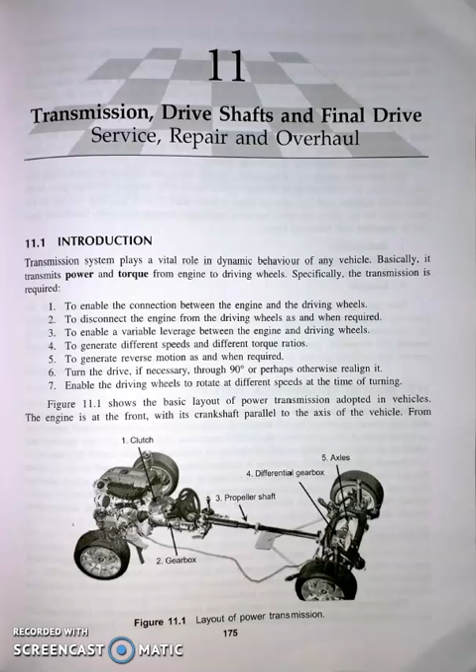The figure shows the basic layout of power transmission adopted in a vehicle. The engine is at the front with its crankshaft parallel to the axis of the vehicle. From the engine, the drive is transmitted through a clutch and a short shaft to the gearbox. In cars, this short shaft is almost invariably integral with the primary gear in the gearbox, but in some commercial vehicles it is a separate component, generally with flexible or universal joints at each end and in some instances with a sliding joint at one end.

From the gearbox, a propeller shaft with a sliding joint at one end and a universal joint at both ends takes the drive to the live back axle. A live back axle is one through which the drive is transmitted, while a dead axle is one that does not transmit the drive. Bevel or worm gearing within the axle turn the drive through 90 degrees, and the differential gearbox divides it equally between the two drive shafts or half shafts which take it out to the wheels.

The gearboxes which are or have been used in motor vehicles may be divided into two parts. Number one, those in which the drive in every ratio is transmitted indirectly through gear teeth which mesh together. Number two, those in which direct shaft drive is provided for one of the ratios, while for the others the drive has to be transmitted through the gear teeth. Here the gearbox is classified in the following types: number one is sliding mesh, number two constant mesh, number three synchromesh, and number four epicyclic.

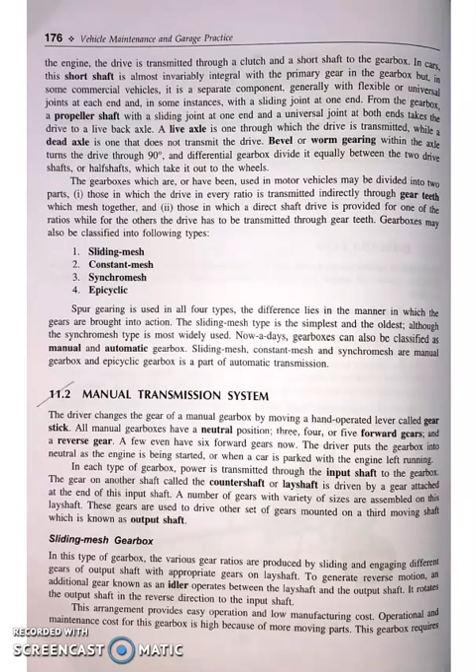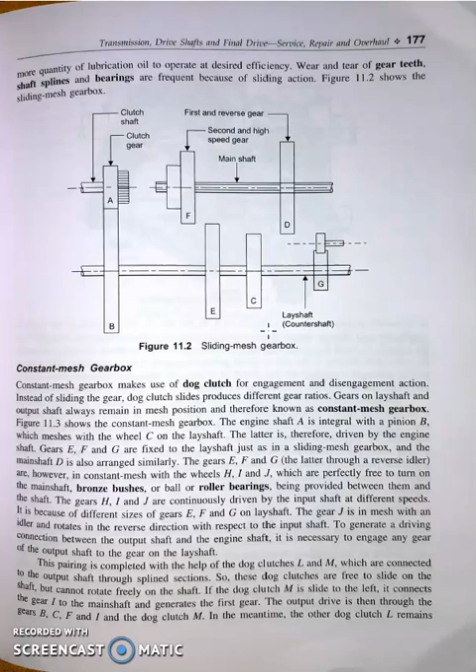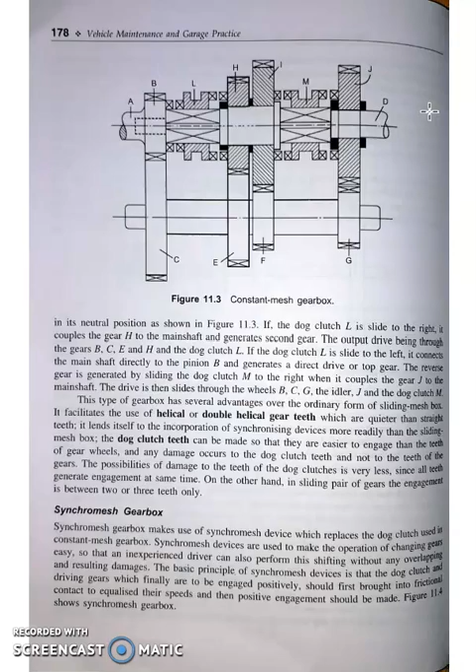For testing a manual transmission, the following procedures should be adopted in case of a fault arising in the transmission. First, take a road test to confirm the fault. Look for oil leakage from the bell housing or general area of the transmission. Check the adjustment if possible. Number three, if the adjustment is correct, then the transmission must be examined. In this case, the transmission assembly must be removed for visual examination.

In this case, the transmission assembly must be removed for visual examination and parts replaced as necessary. Road test and check operation of all transmission.

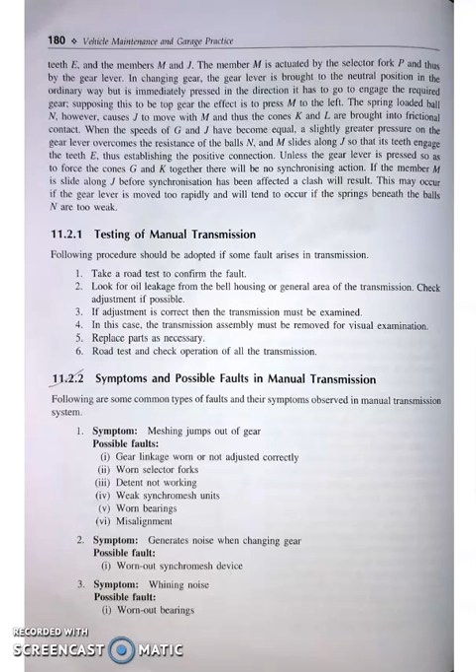So after the testing of transmission, now comes the symptoms and possible faults in manual transmission. There are 9 symptoms and their possible faults. The problems or symptoms are meshing jump out of gear, generates noise when changing gear, whining noise, difficulty in changing gear, noisy in particular gear, noise in neutral position, vibration, oil leakage, gear clash when shifting.

So basically these 9 problems or 9 symptoms and their possible faults are here. For example, if the symptom is vibration, then the possible faults are lack of lubrication, worn bearings, mountings loose. The symptom is gear clash when shifting. The possible faults are lack of lubrication, high engine idle speed, and worn bearing.

Now, next is common service to be carried out for manual transmission system. It does not need periodic service or routine service maintenance. Transmission operated by external linkage from the gear shift lever may require a shift linkage adjustment. Follow the procedure given in the vehicle service manual.

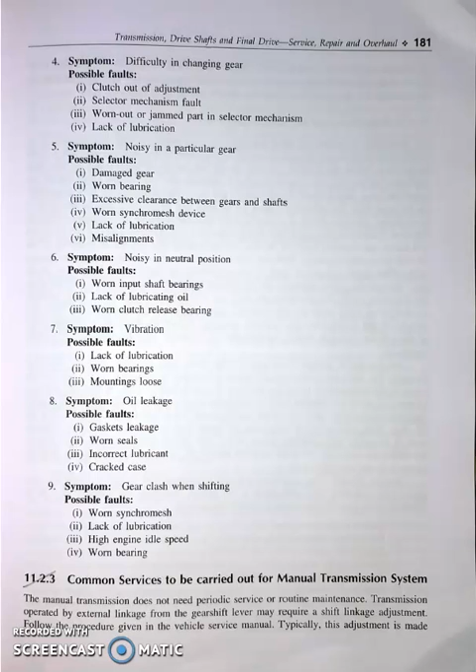Typically, the adjustment is made by disconnecting the rod from the lever of the transmission. Then place the gear shift lever and the transmission lever in neutral. Adjust the linkage by turning the threaded pin on the rods until the pin slips in and then clip into the transmission lever.

Next is lubrication of gearbox other than epicyclic type, which will be considered later, is usually effected by putting enough oil into the box to ensure that at least one gear will dip into the lubricant. When the gears are rotating, the oil will be thrown about inside the box, thus lubricating the various parts.

The oil required is different from that suitable for an engine, the conditions being quite different. Temperature is low and carbonization has not to be considered. On the other hand, the pressure to which the oil film may be subjected may be heavier than in an engine. The instructions of makers and the advice of reputable oil companies should be followed.

It should not be thought that filling a gearbox to a higher level than that recommended will reduce the frictional loss in the box. On the contrary, the loss due to churning of the oil will be greatly increased. However, overfilling is usually obviated by suitable placing of the filler spout.